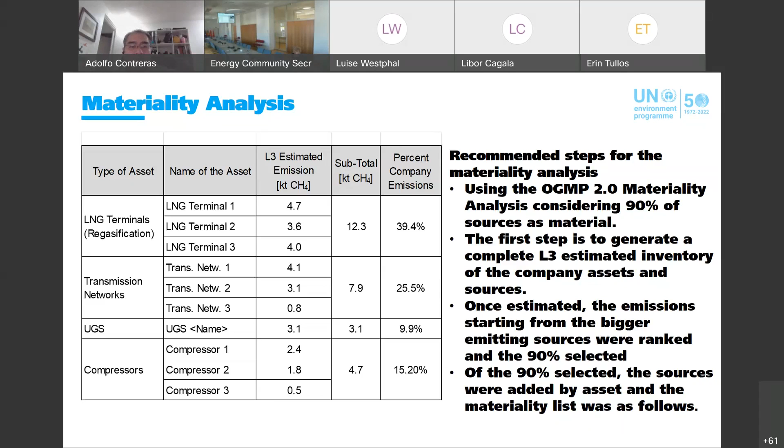Another important part is the credible and explicit path for operated assets. In this part of the implementation plan, the company can explain and elaborate a bit more on how they are approaching, or how they plan to achieve, the gold standard in the next 3 years.

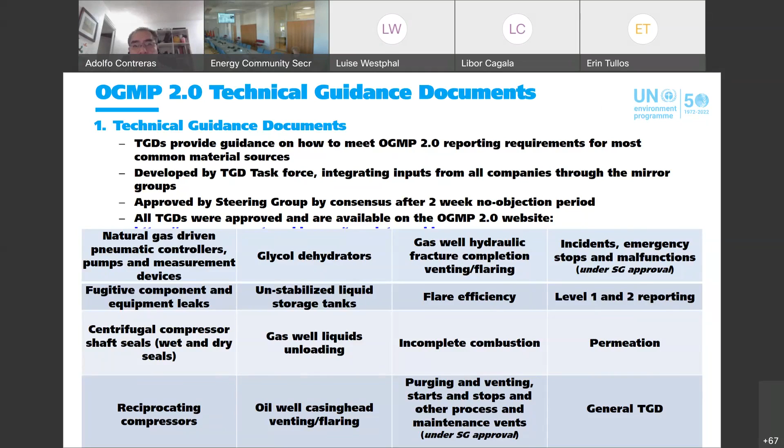Thank you. As an example, I took flare efficiency. We have a TGD on that. It was approved by the steering group in June of 2021, and the structure is basically the same for all the TGDs.

It's a brief description of the source. In this case, for example, the types of flares, elevated or ground flares, what a typical flare system consists of, its role, and types of flaring - continuous, intermittent, batch flares released in a discrete batch - scope boundaries, all sources of emission related to incomplete combustion of waste gas.

Whether in a flare, enclosed flare, or combustor, it should be reported in the flaring category. Then we explain in a very accurate way how to report in level 3 or level 4, explaining and giving examples for quantification methodologies and some example models.

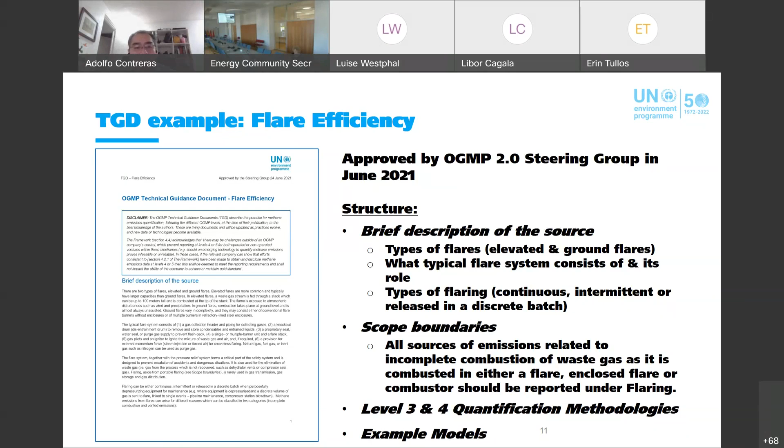Following the example, in the case of flare efficiency, we have the level 3 quantification methodologies. The companies should consider three main source data points: the gas flow, directly measured or with mass balance; the gas composition, either directly measured, through mass balance, process simulation, or regulated specifications.

In this case, because it's level 3, we can consider that the destruction efficiency of the flare is assumed to be 98%. We know that in most cases this is not a real value, but because it's level 3, we can accept that, or the country or company can use specifications at the country level.

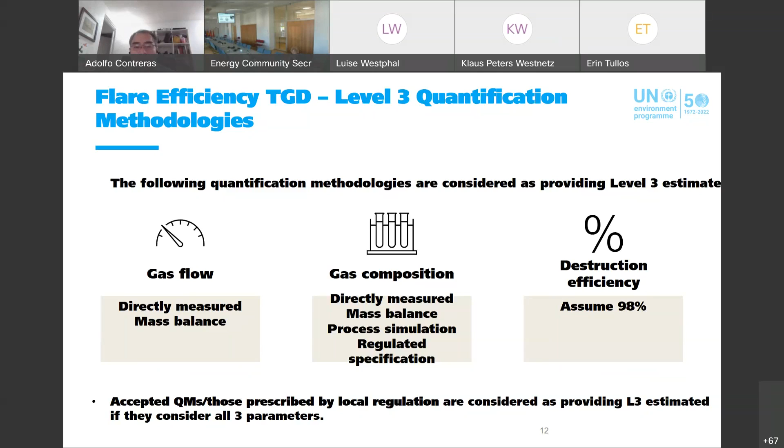In the case of level 4, we are a little bit more detailed. We consider basically the same three source data: gas flow, gas composition, and destruction efficiency. But in this case, we request continuous direct measurements, mass balance, or process simulation for gas flow. For gas composition, we also request continuous direct measurements or sample measurements. And to calculate the destruction efficiency, we request measurement-based methods or determination via representative sampling.

Or there is the other case of engineering calculation, considering wind speed, wind direction, humidity in the atmosphere, and other possible variables. The uncertainty guidance provides guidance on how to develop statistically representative samples, for example, in the case that the company owns several similar flares.

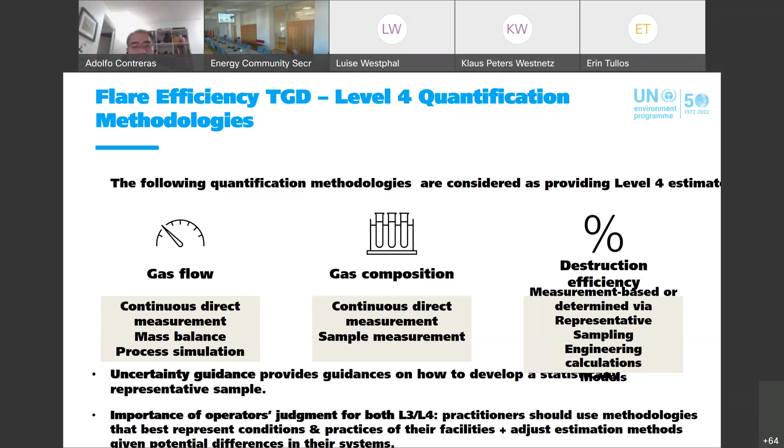Importance for the operator's judgment for both L3 and L4: practitioners should use methodologies that best represent the conditions and practices at their own facilities. So basically, in level 4, we request more information so that we have high confidence in the final value.

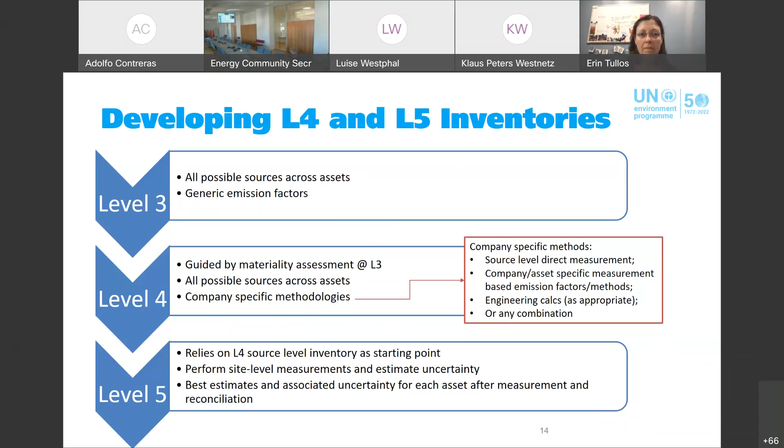Thank you. Reconciliation in this reporting process is an iterative process of investigation. It's not some sort of bottom-up or inventory-based measurement compared to a single number, trying to make those numbers match. Rather, each year it's about developing your best estimate at a source level inventory.

Defining an independent sampling strategy for site level measurements that considers the population of assets, the largest sources, the largest uncertainty, performing measurements for this sampling strategy, which is not everything - it's simply a representative sampling - comparing the sum of your inventory with those site level or population of site level measurements, and making adjustments to your source level to reflect the learnings at those site level measurements. We know that seldom, if ever, will those numbers match exactly, but they should inform a best emissions estimate.

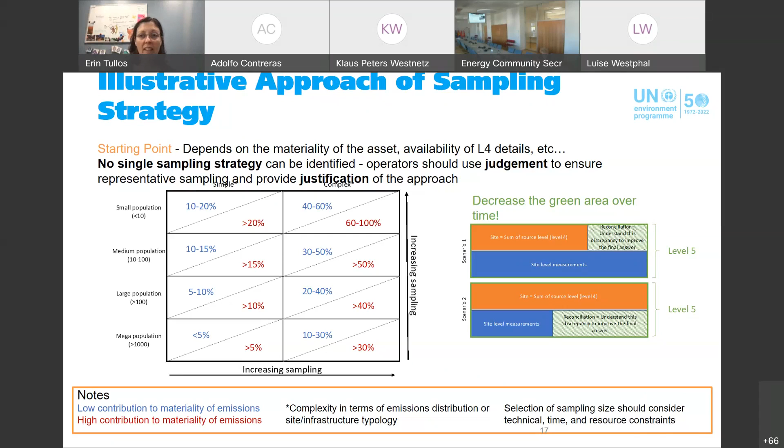Second, measurement should include an estimate of the uncertainty as well as the source level estimate, because that uncertainty is important context to understand how similar those two values are. There should be reasonable agreement within the uncertainties, but we expect that, again, it's an iterative process and it'll improve year over year. And finally, operators should apply judgment and focus on reducing uncertainty where it matters most.

Again, if there's a source that only represents 0.5% of your total emissions, being 100% wrong doesn't really change your total answer very much. If there's a source that represents 40% of the emissions, being 100% wrong matters a lot. And so focus where the answer matters. And that's it for us.

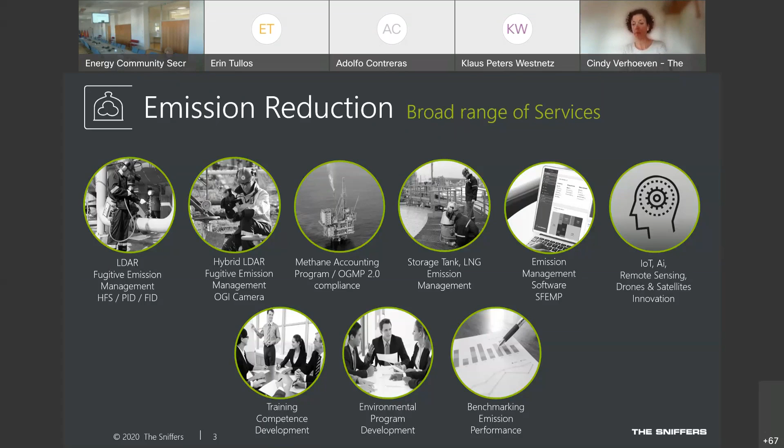We have also developed our own emission management software program. We have done that basically since the 90s to manage our own data, and year by year it has evolved more towards a customer reporting tool. So yeah, we've already heard some presentations regarding the OGMP 2.0 framework and what the different levels mean. What we see is that as of level 3, a source-based inventory is needed, and basically that is also the backbone of any high quality and successful LDAR program.

So what I would like to focus on today is an LDAR program, which is basically measuring fugitive emissions. We see that this is a very good place to start because these types of measurements are very easy to implement, lower cost, low effort basically. And we see that other emission types, like incomplete combustion and flare efficiency, are often more difficult measurements to implement. So that's why starting with LDAR, starting with a detailed inventory of sources, is a very good place to start for any emission reduction program.

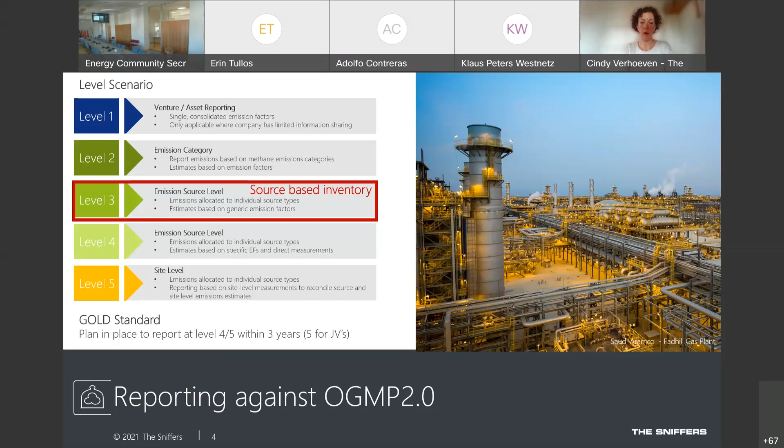So when we start, we typically see this kind of situation. Companies have targets and they would like to understand where they are now with their complete emission picture and how to move towards their targets. Often companies are already performing measurements or they have estimates and models in place. But if you want to move towards level 3, level 4, and level 5, especially if you are going to compare a top-down and bottom-up approach, you need to increase the reliability, the completeness, and also the accuracy in your program. And that is basically what we help companies to achieve.

So as I mentioned, we start by building the backbone of a program, which is the source inventory. Having a good understanding of your assets and how many sources there are allows you to shape a program, make a multi-year planning, and define a measurement scope. That is the first step. Even if in the beginning it is not yet clear which measurement technologies to implement or what leak and repair threshold to consider, especially with European regulation coming up and not yet finalized, there are a lot of question marks. But an inventory is something you don't have to wait with. You can immediately take that first step because it will help you further down the line as well.

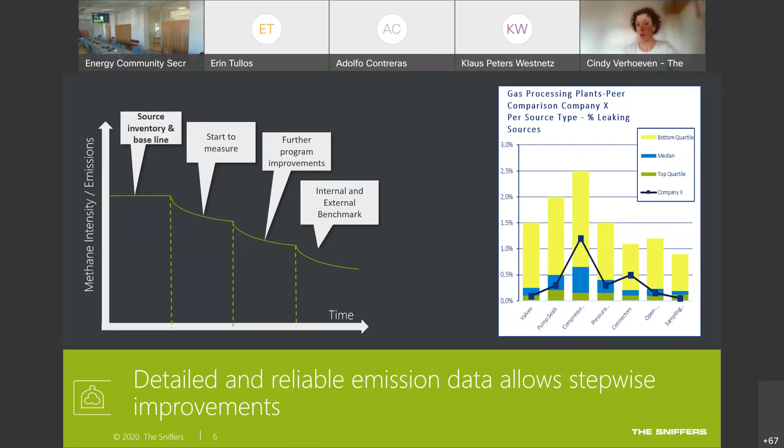So here you see an overview of the most important steps. There are basically only 3 steps in an LDAR program. First, identify the sources, building that inventory. Secondly, quantify, which is the measurements out in the field and then calculating emissions. And then there is the reporting and follow-up. There should always be that third step: closing the leaks, mitigating emissions, improving the situation, and using that as input for the next LDAR cycle.

So we realized that by following protocols that are already there and defining a very clear scope and cycle, and then of course building that inventory, based on those 3 we carefully choose measurement techniques. Sometimes a regulatory framework in a certain country is already in place, and you have to use a certain measurement technology to be compliant. We also have, of course, highly trained people.

I'm not sure if I click on this. Can you see the screen now?

So we keep track of a knowledge database, a matrix where we train people to work with those different measurement technologies. That is very important. Too often we see, for example, maintenance people who already have a very full day-to-day job and additionally have to perform measurements. We train our people to perform 1,000 reliable measurements per day. That's quite a task.

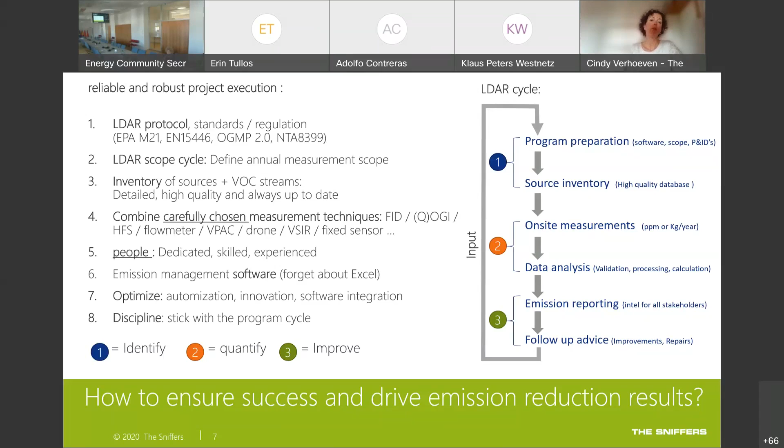Yeah, and the final point is discipline. So every time stick with the program cycle and try to follow up. Those are basically the most important steps. And here you see an overview of the identification, quantification, and reporting.

So we, as a measurement company, most of the time, our clients see the middle part. They see the technicians in the field and they think, okay, an LDAR program is performing measurements, but it's actually much more than that. So we do pay a lot of attention in the preparation phase, but that has a very high payback later on in the reporting phase, because basically your emission data is as intelligent as your inventory, as the level of detail and everything that you put into the source-based inventory.

Is a source accessible? Is it insulated? What is the composition? We also take that into account. When I have a leak, we know the composition exactly. It's not always gas. Of course, in the gas industry, it's mainly methane that you're measuring, but it can also be condensate or any other substance.

We also measure, for example, in downstream facilities such as refineries, where you have all sorts of hazardous substances and volatile organic compounds. So we take all that into consideration, and that gives a higher accuracy in your methane emission calculation in the end.

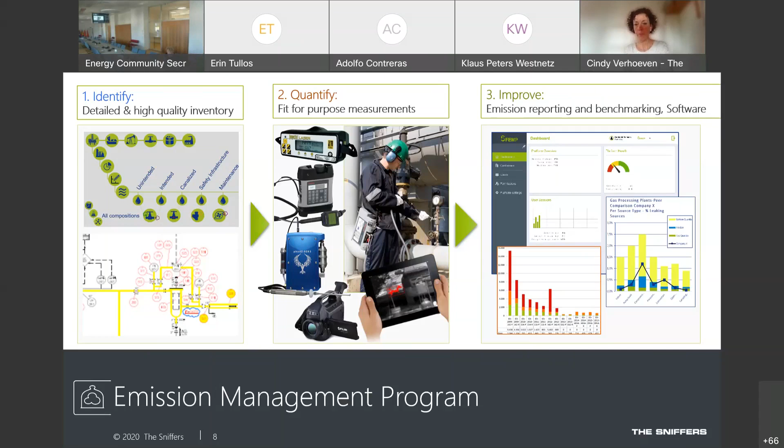Here you see a very practical overview of the devices that are most commonly used for fugitive emissions for LDAR programs in the field. Portable devices, very easy to implement, handheld, fast. Of course, we do see some differences. The EPA ranks bagging or high flow sampling as the highest accuracy.

It's EPA rank 1. That means that you actually bag a leak and you measure the flow and you measure the concentration, you know the molecular mass. So it's a direct loss measurement in grams per hour or kilograms per year. If you actually want to know what is coming from a single source, this is the best field measurement you can do.

The second is the sniffing device, which you see in the middle. You see a blue device, which is basically the most modern version. It's connected with our software for automatic data management and processing. Methane can be measured quite well with handheld laser devices. All these devices generate a concentration in ppm, and you use factors to convert those concentrations into a loss in kilograms per year. So it's not a direct measurement, and that immediately means a lower accuracy.

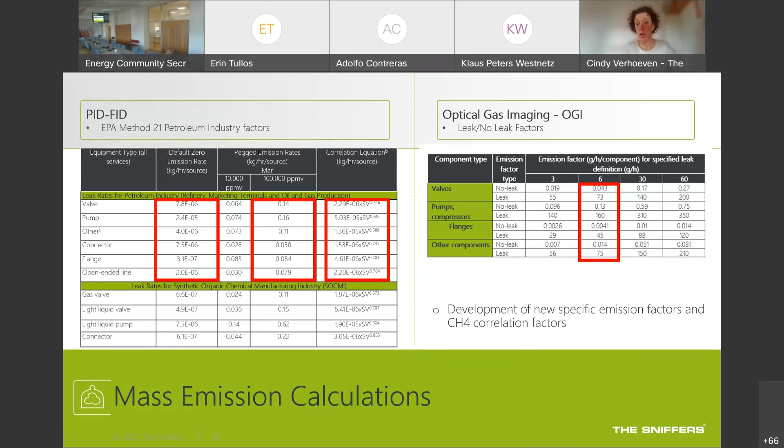So we see when we start to high flow sample, so actually bag the leaks, that's when we see big deviations. Here we see an example of high flow sampling. So you actually put a bag over a piece of equipment and measure what's coming out of it.

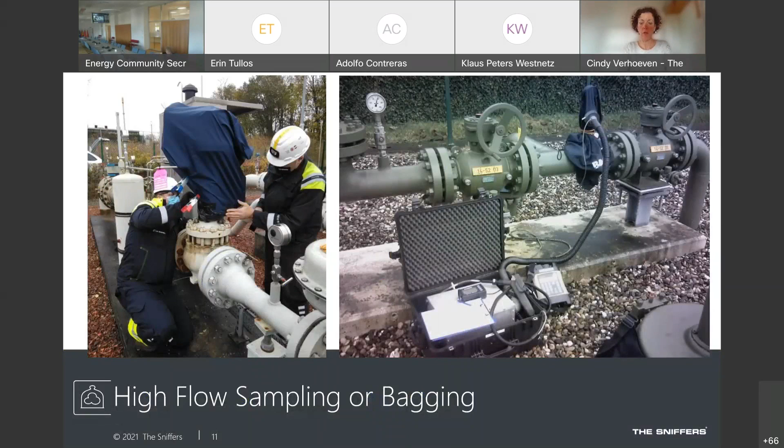Well, that immediately brings me to this slide. The original high flow sampler was used in the 90s to develop those factors, but it was discontinued from production. So the original high flow samplers are very hard to maintain. It's old technology. And at some point we decided to develop our own high flow sampler. Modern device, lightweight. We are actually using these devices. We've built a couple of them.

And we believe that such a modern device, that also has connectivity to software, higher accuracy, automatic data processing, so a high traceability, is absolutely needed to develop those new methane-specific emission factors or correlation factors.

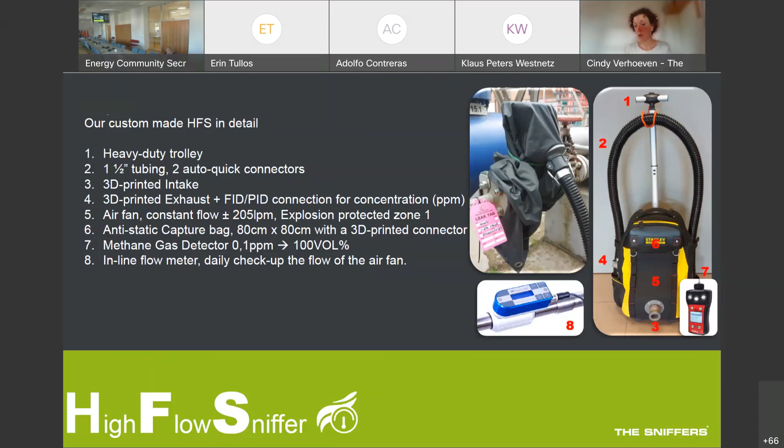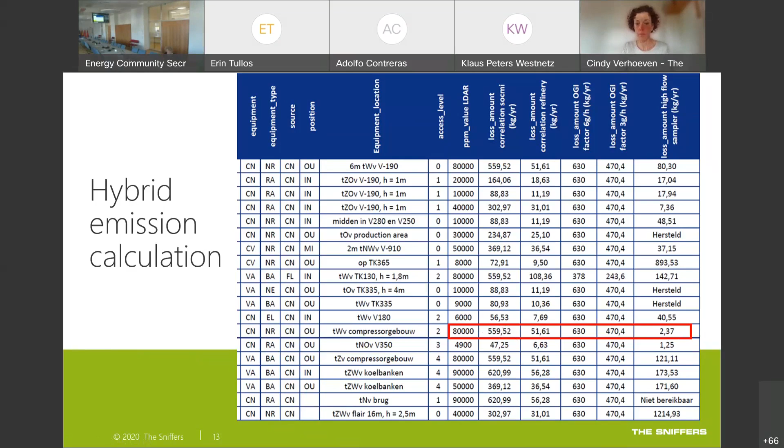Leak quantification using the camera in combination with the Providence Photonics tablet is also an option. The advantage is that you can apply this on sources that are not baggable, that are, for example, too large, or the flow doesn't match the high flow sampler, or it's simply not accessible. Then this would be a nice alternative.

Again, it's not that easy. It's not always a solution. There are some drawbacks. Everything is an issue with the camera: distance, delta temperature between the gas and the atmosphere. For example, moving leaves in the background or water puddles can be interpreted as emissions. So these are very practical things that we as a technology provider know, and that you really have to take into consideration in your program, that these inaccuracies can lead to very large deviations from reality.

Something we also advise and is often overlooked is internally passing valves. So when we measure, for example, combustion efficiency or venting emissions, the actual root cause may be a valve leaking on the inside, and that is also something that you can detect and quantify at that point.

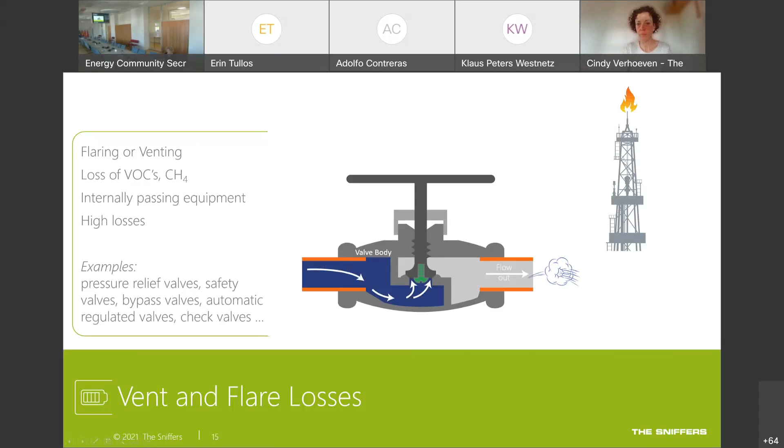Sometimes the exhaust, the flare or vent tip, is very difficult to measure. It's high up, at high altitude. You do see an emission there, for example with a camera, and you can use another technology to find the cause of that emission. Here you see the device looking for internally passing valves.

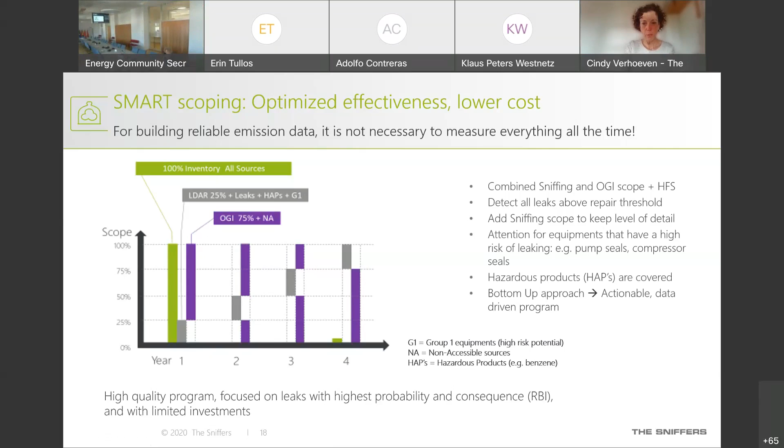So basically what we would advise is to build a program, a multi-year program, mixing up those technologies, but always starting out with that inventory and baseline emissions. And then the final quick slide I would like to use is: bring all that emission data together in a suitable and dedicated software program.

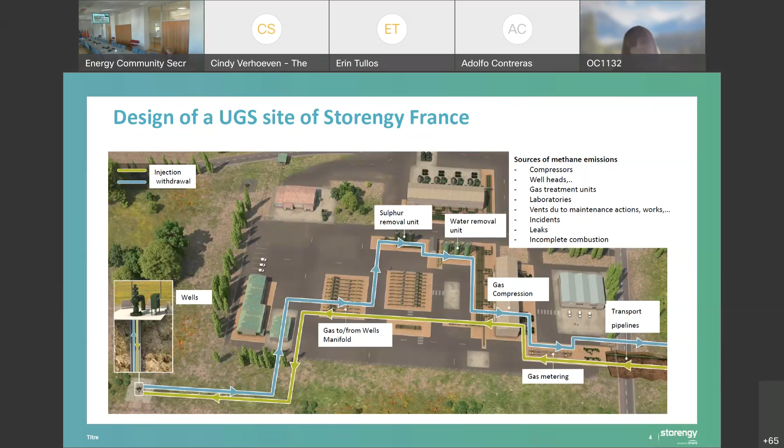For instance, Storengy France is now reporting each emission source at level 3, with efforts to reach level 4 and integrity of all our emissions at level 4 by 2024. So now, with the arrival of the technical guidelines, we were able to confront our internal methodology with what is proposed by OGMP in these guidelines, to compare them and validate it.

First of all, we validated our methodology, and for those sources that were not compatible, we were able to integrate the formulas proposed in the technical guidelines to get at least level 3, and we know what to do to get level 4 for each source. So it's a very useful document supplied by OGMP, which can orient all actors in order to improve their reporting.

So now, source per source, what we are doing to reach level 4, as a mixture of explanation about reporting and implementation plan. About the compressor, the compression units, we are considering this a material source. It's about 30% of our overall methane emissions. We have three different sources of methane: the compressor seals, the startup, and the shutdown phases.

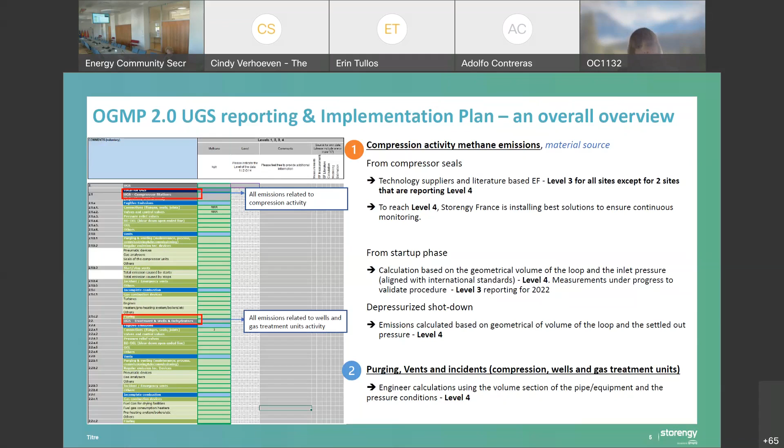So what about fugitive emissions? Just to complete what was said before by our colleague, we've been doing LDAR campaigns for a few years now. These LDAR campaigns involve not only detection but also quantification. We are doing this for all the components of each of our UGS sites.

How are we doing this? We use a certified subcontractor who uses infrared cameras for detection, and then FID analyzers for quantification. The quantification methodology is recognized by international standards, as mentioned before, and the subcontractor is certified. So we consider that we are estimating our emissions at level 4.

No matter what, there's some news coming from the European regulation project on methane emissions, which is asking to increase the detection level of our LDAR campaigns to 500 ppm. So we started readapting our LDAR campaigns to this, meaning significant changes are going to be made. We have a first result, a first experience from the first site where we've done this year, increasing the detection level to 500 ppm.

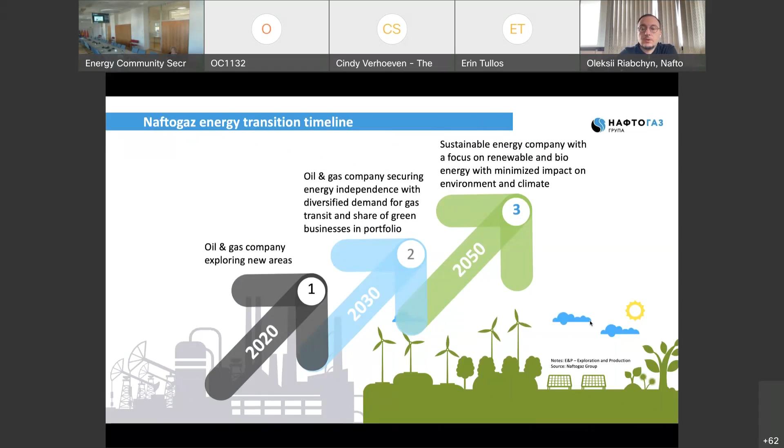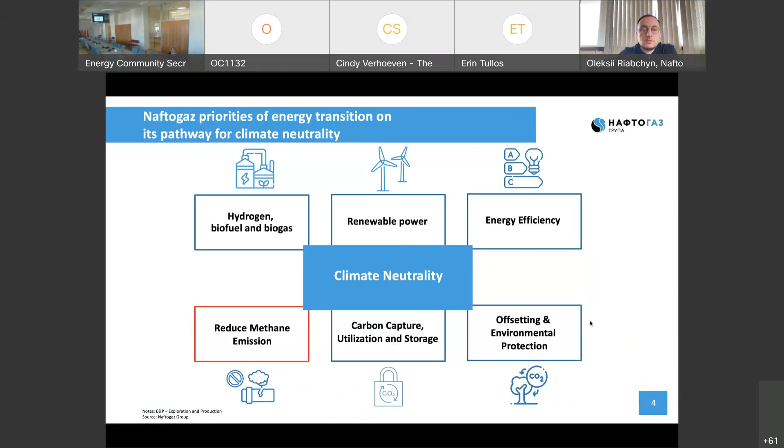Prior to the war, we had a methane reduction emission strategy in our green portfolio. We planned for 10 years to secure energy independence, diversify demand for gas, and be a sustainable company till 2050. Methane emission reduction is among the important steps in our pathway to climate neutrality that we plan to actively be involved in.

We were supporting the Global Methane Pledge and were fully committed to methane reduction strategies worldwide. So we were part of the global context.

As for our timeline for methane emission reduction before the war, we had a memorandum with the EBRD and our ministry, and did our first measurement campaign in 2019, with a second stage in 2020. Last year we submitted the Level 1 report on OGMP 2.0, and our pre-war plans included compliance with Level 3 of OGMP requirements and implementation of measures from the investment program.

But because some objects got damaged and are located in occupied territories, data on them is limited, so Naftogaz will unfortunately submit only a Level 1 report in 2022, and will continue to gather data to upgrade to the next level.

We also did numerous activities for methane emission reduction at our UGV extraction units. Mostly we had problems with liquids in our wells, and we implemented several technologies. We invested several million dollars to test the technology and decrease the amount of methane, and we had plans to invest more.

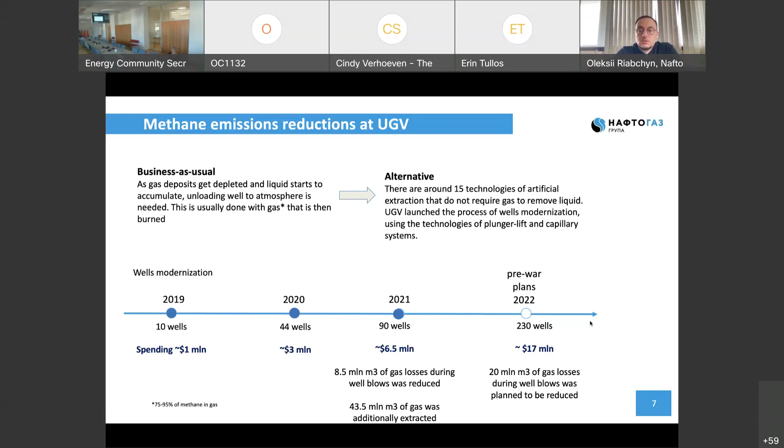Unfortunately, we are currently more shifted to other activities, but as you can see, we were really involved in methane emission reduction.

But the war changed priorities from development to more security. We have problems with mass migration, a decreased number of subscribers, destroyed infrastructure, problems with gas sale, and suspended business, among other problems.

Unfortunately, our production, about 80% of which is in Kharkiv and Poltava Oblast, is now close to the combat area, so it's really hard to gather data from this territory—not to mention the employees who, with their families, sometimes fled to neighboring countries or safer locations.

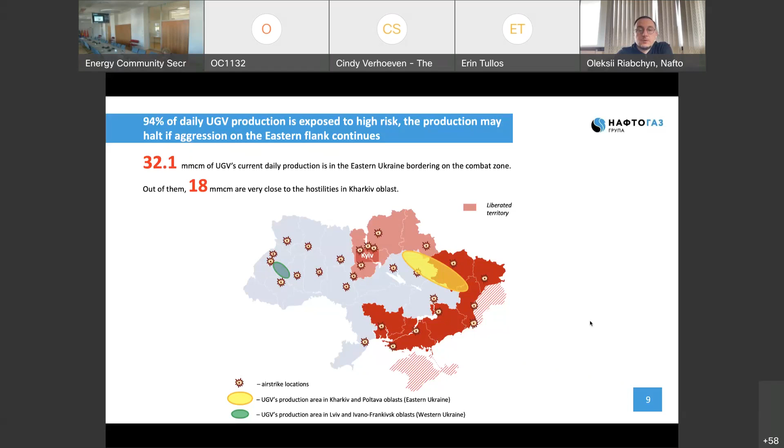So it's obviously really hard to demand from management that employees also be involved in normal routine activities, which include methane and other environmental work.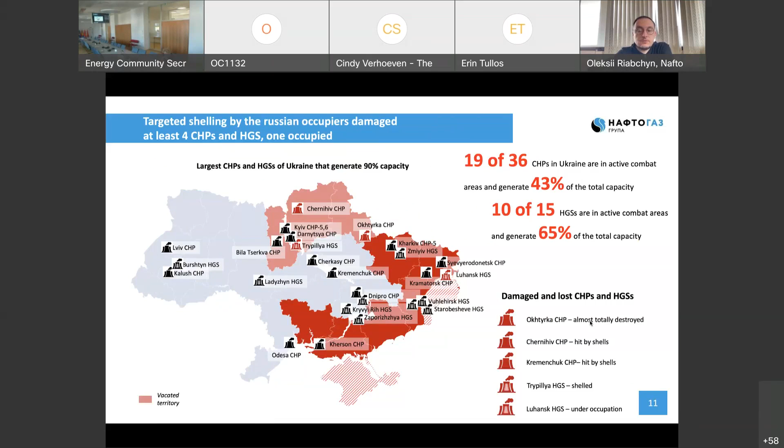This is briefly the damaged infrastructure—we have several locations captured, several of our CHP and heat stations damaged. But to return to OGMP, we previously checked the emission categories and methodologies against the existing OGMP standards and those adopted by different branches of our company.

We identified the gaps and things that need to be clarified for our internal processes. But often it's really hard because you need to adopt a methodology, deal with scientific institutions who will help, and then verify them. So it's very hard and intensive work.

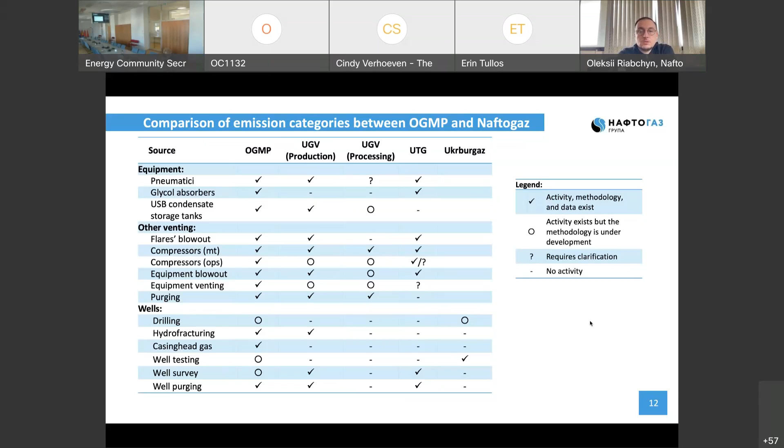Currently at a low level, but we will definitely continue to work in line with OGMP methodology.

To conclude on OGMP reporting, given the war circumstances, we have local data issues. Since some objects got ruined, damaged, or are now in occupied territories, some employees responsible for data gathering either served in the army or left—so basically, the human capital needed is not currently able to engage in the activity.

We have discrepancies with practice—some categories are overestimated, some underestimated, but that's more or less our internal issue. There are differences in reporting between legal entities, sometimes there's no unified database, and we have problems with completeness.

There are some OGMP categories that are currently not covered, as we showed on a previous slide, and some not-estimated categories that are difficult to quantify to a good level of accuracy. Regarding materiality, bringing Level 3 reporting to Level 4 reporting will require a materiality analysis across emissions, which we will definitely do, but a bit later.

And as a general summary, unfortunately for Ukraine, the war has changed priority from development to security with high level of uncertainties. It was much easier to sell and to get more funds for climate and environmental issues before the war, but currently methane emissions is not the biggest polluter to tackle. We have new sources like military equipment, ruined infrastructure, such as oil bases and gas transmission systems.

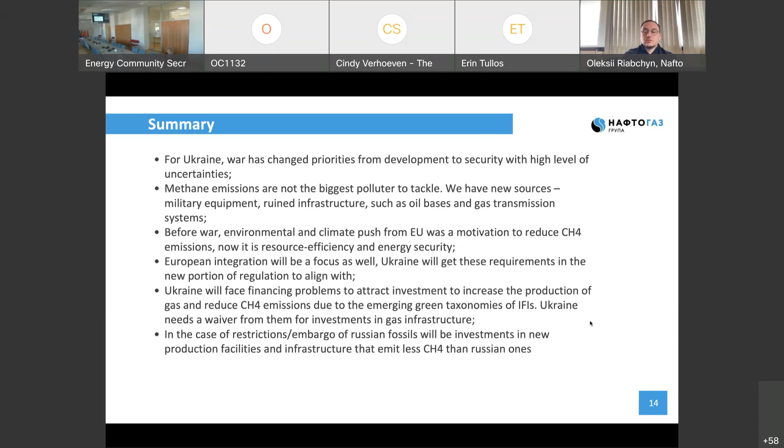And in case of a restriction or embargo of Russian fuels, there will be investment in new production facilities and infrastructure that emit less CH4 than Russian ones, and we do hope that it will also be in Ukrainian territory, and we will be able to increase our production and probably substitute the Russian producers to help Europe with energy security.

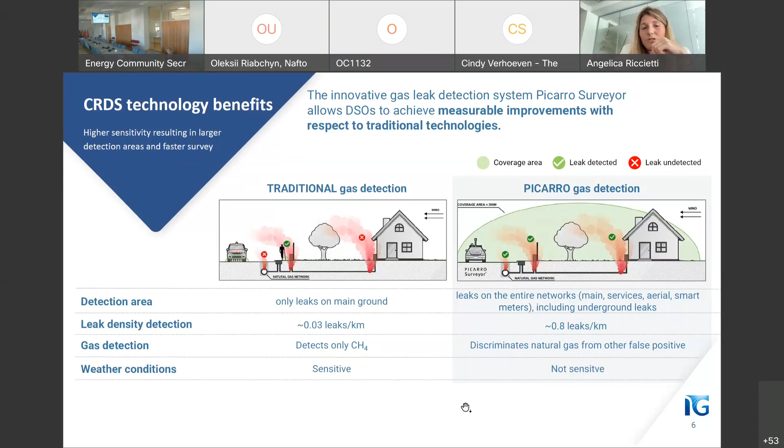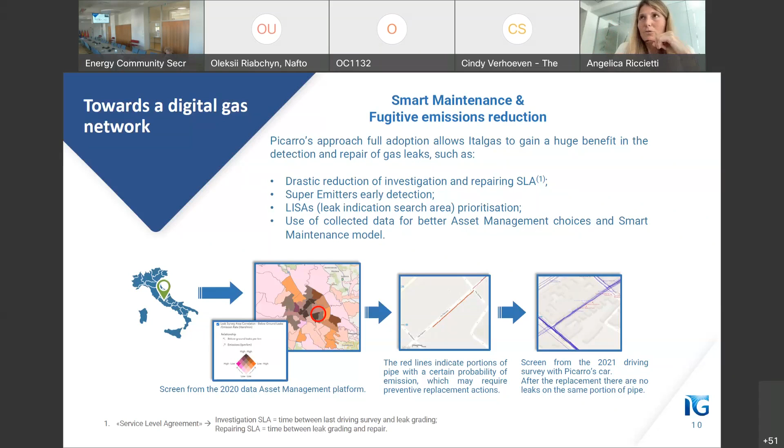In the bottom of the slide, you can see an example of Rome, where the figure shows that the central part of dark color is the most critical one and the most emissive, and so we focused on this part in order to concentrate and focus our intervention, and so this is the asset management. We can jump to the other slides where we can open the new topic.

As I told before, the core business of Italgas is focused on gas distribution, which it carries out as a part of the wider national system involving the distribution of gas on behalf of sale companies authorized to sell the gas to the end customers. And the operations for the gas distribution business are managed by three main companies in Italgas. That is Italgas Reti, which operates nationwide, Toscana Energia, operating in the Tuscany region, and Medea, operating in Sardinia.

We have also the non-operated companies for which we report the emissions in the annual reporting of the OGMP, as for example Metano Sant'Angelo, located near the city of Milan, Umbria Distribuzione, located in the Umbria region, and the Rete Distribuzione, operating in the area near Turin.

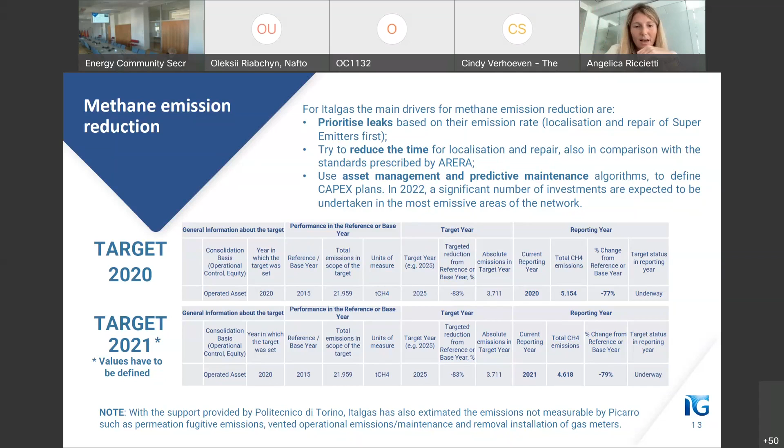And second, in terms of leak detection and repair, Italgas is setting up a test field in order to carry out cross-examination tests, for example with the high flow sampler, in collaboration with the university just mentioned before, the Politecnico di Torino, and is promoting the test phases of new technologies such as drones and satellites.